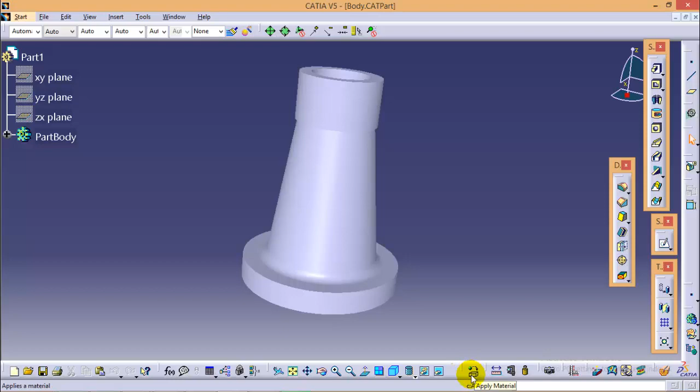Here's the body. Now if you want to apply some particular material, you can select this option over here, apply material, and if you click on this you will be opened with a window with multiple tabs like construction, fabrics, metal, etc. So what you need to do is drag that particular metal and apply it to part 1. Here you can see I have applied copper metal on this particular part.

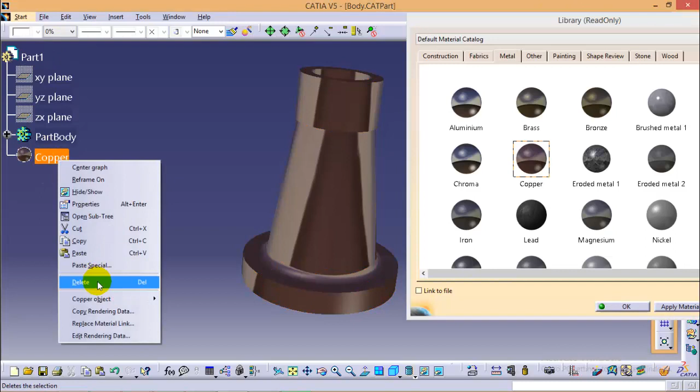If you don't want it, you can also delete it from here. Let's select some other part and apply steel on part 1. So yes, here we are with the steel body. Let's select apply material and OK. In this manner we have applied a material over a body.

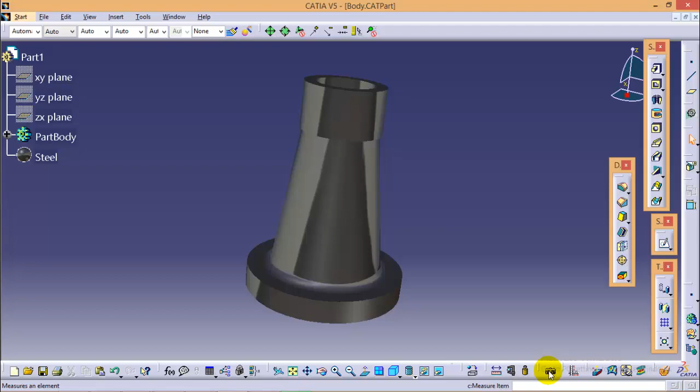After this, if you want to render this particular part with a different background color or different color intensity or other light intensity, you can do that by selecting this option over here, the Photo Studio Easy Tools. If you select this option, you will be opened with a different background.

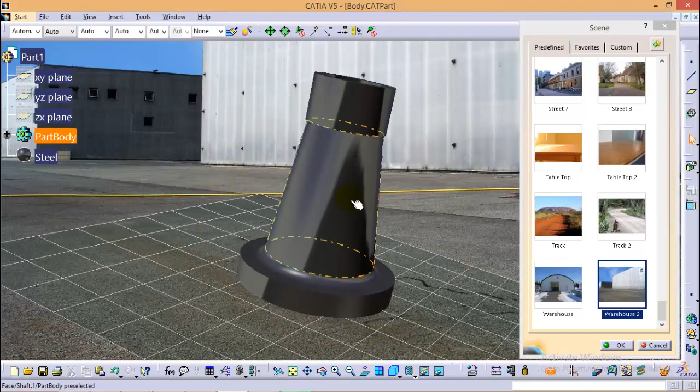You can customize your background from this tab. You have a number of backgrounds over here, so let's select a background, say warehouse 2. You can also orient your figure, zoom it in and out, and adjust as you want.

You can also customize the light intensity from this part, like this much, in this way. So yes, here we can do it.

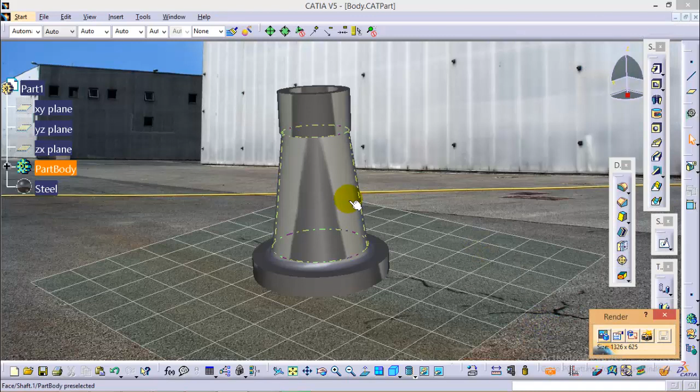If you want to capture this particular part and store it in JPG or other picture formats, you can do that by using the render button over here. It will quickly render it and show you a pictured format of this particular file.

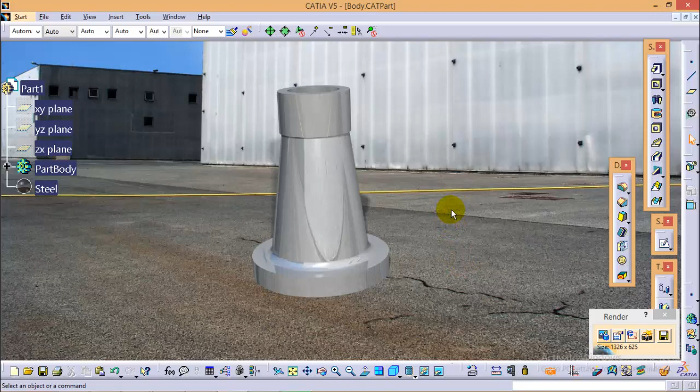So yes, here we are with the rendered picture. Rendering may take some time, so after rendering the figure you can save your file at your desired place. We can have a number of file types, and you can select any one of them.